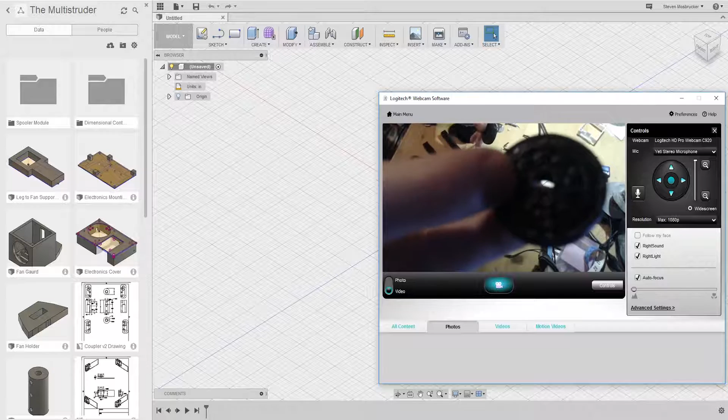Let me put this up here and get my webcam going. So I have a few things here - these are actually bearings, I don't know if you guys can see that, but those are bearings. And here's another bearing. So these are a few different settings.

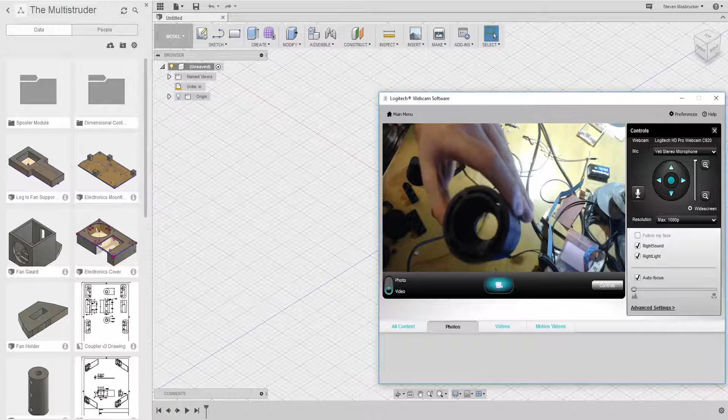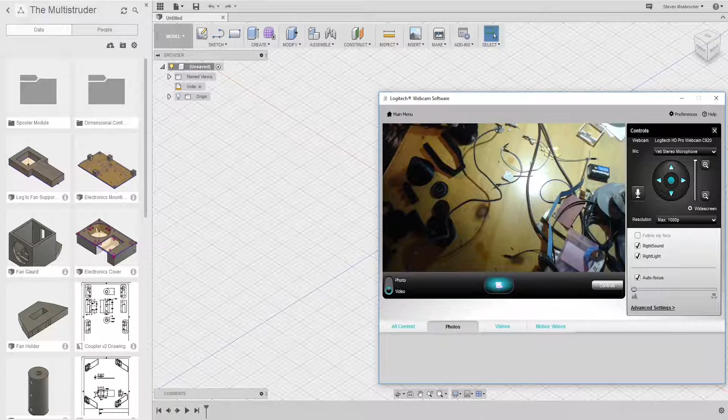First things first, let's go over this guy - this is the roller, and you can see it's been changed quite a bit. Let me get my orientation down here. It now has a bigger hole, and inside it's actually tapered. It has that same hole that this pulley does, if you remember. I'll show you guys that change here.

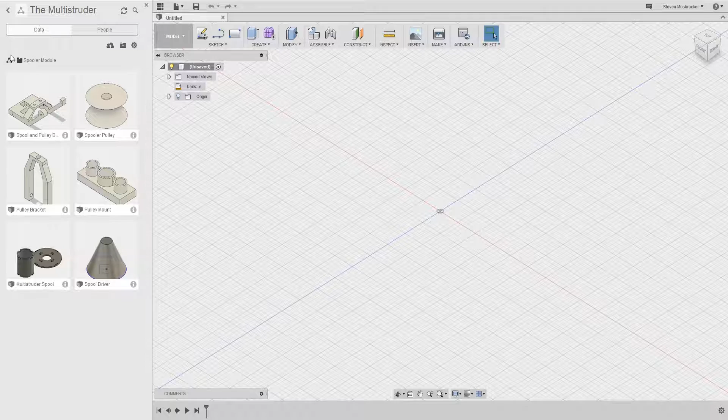Let's go ahead and move this guy over here, or maybe even up here. I like that, okay. So let me go ahead and show you guys what I did on that. Oh, yeah, and also sorry about my dirty desk.

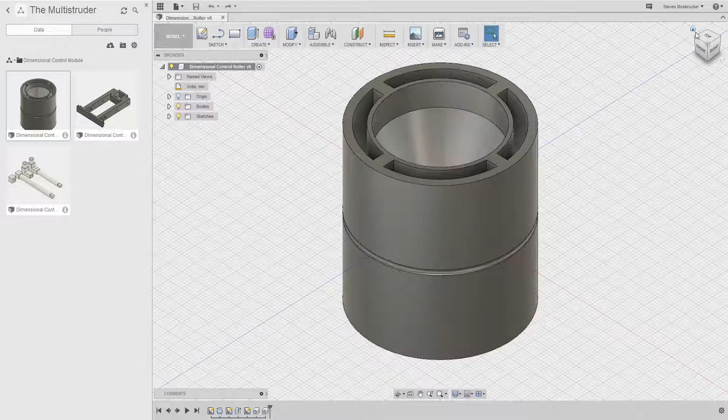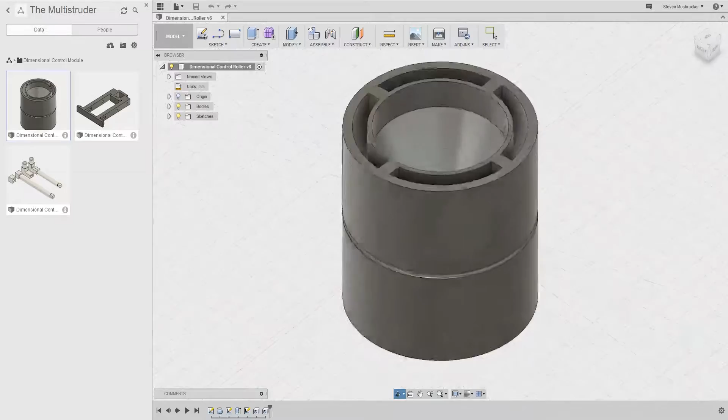This guy was set up for these larger bearings, so those bearings were definitely too small to have set up that way. You can see here the taper, because the issue with that flat spot is that it would be hovering, whichever side was flat - if this was closed and flat, it would be hovering. So again I had to do the 45-degree taper, just like on that pulley I showed you. 45-degree taper on this side, and also 45-degree taper on the other side, and also this hole is adjusted for the pulley. You'll notice for the pulley that these bearings fit in there.

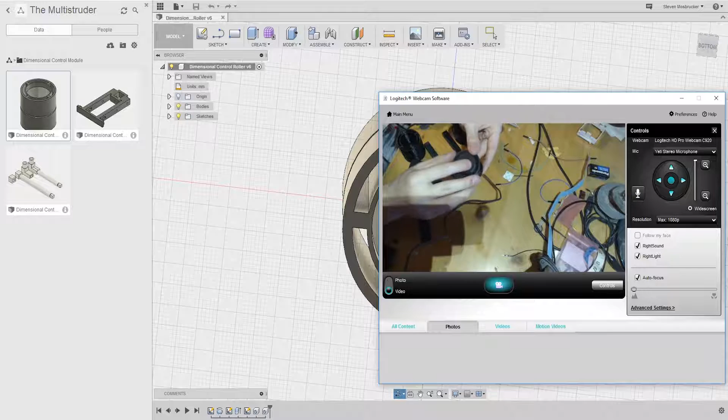Also, these bearings are going to need some work because they're too close to the outside. So what happens is they're fusing together and I can't break it free - they do work once you break them free, but I can't hold this inside hard enough and twist it to break free. As you can see, those guys fit in pretty snugly. So if I change that inside, I might have to increase the outer diameter, and then deal with that. And obviously this pulley is going to have to also be changed there as well - that's going to have to also be drilled out.

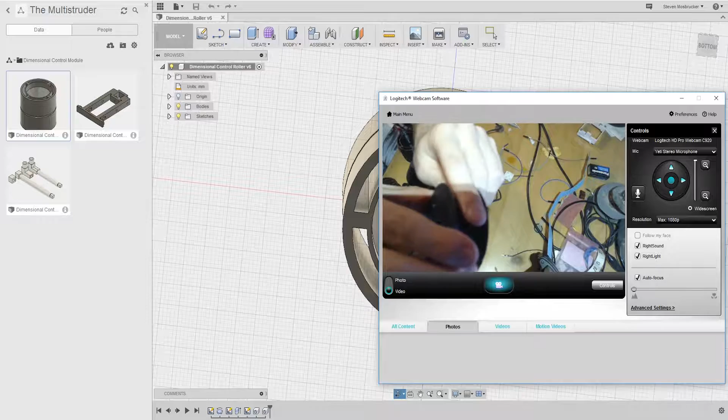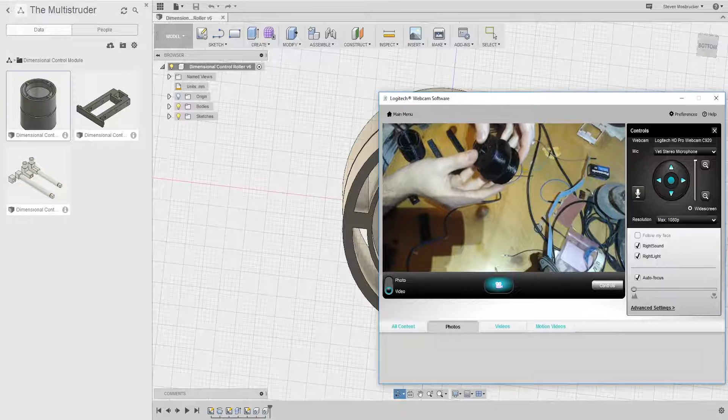So what I did is I just decreased the top diameter. If you compare the two here, there's quite a bit of change - I think I dropped it a whole inch or so. Now this guy has really smooth corners, really nice, but I don't know how well the filament is going to stay in that groove.

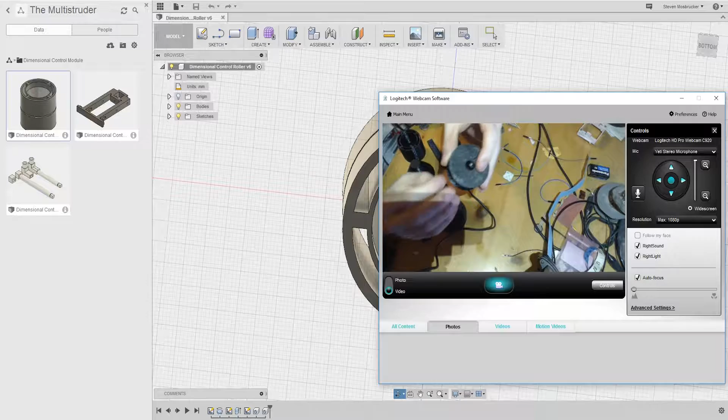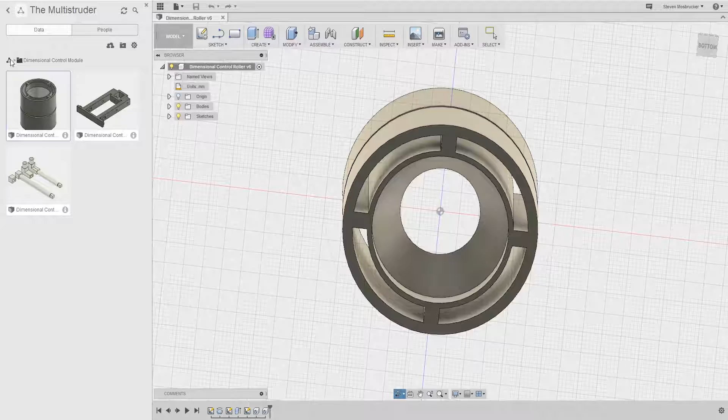So what I might do is go onto this pulley and just do a 45 and then revolve it, so that the filament stays right in that hole and doesn't go up and down on the pulley, and also eliminates any issues with that little sharp point at the top. So I'll change that and give you a look of that here - that would be the spooler module, right here. You can see now it's quite a bit smaller in the spooler module.

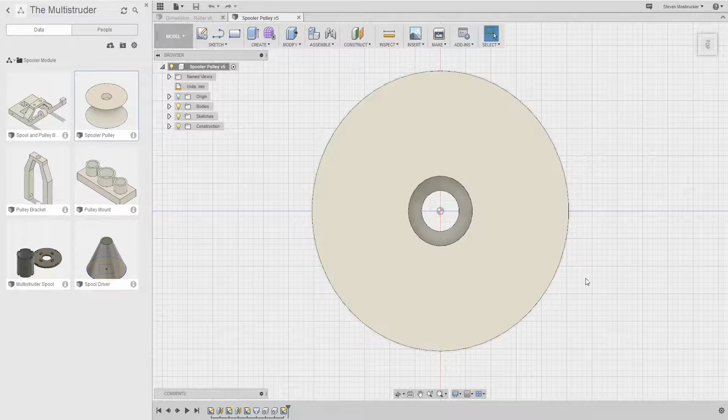This one is also going to need to be opened up, meaning it's definitely going to be a lot hollower. What I'll do is I'll probably first turn this into a V and then revolve that. So I'll probably completely redesign this one, get rid of those three planes, and pretty much start from scratch.

Go ahead and open up the next one while I show you guys. Let me see what the one I started with was. I started with this one, which is the one where the pulley attaches to, where this guy attaches here like that, right? And then this guy goes up and attaches to the big assembly, if you see here on my main screen, that big assembly there. So this is what we started with, right?

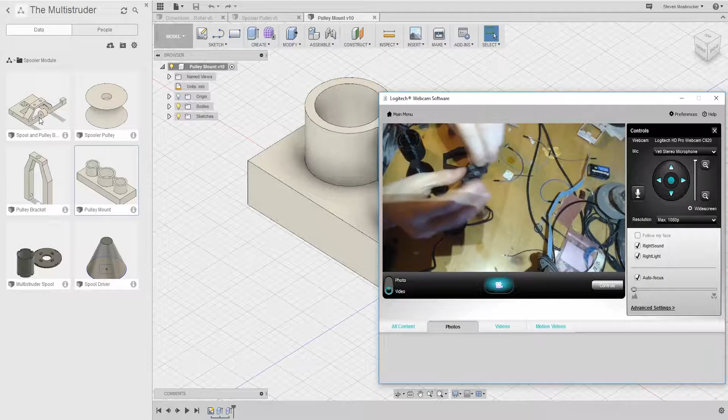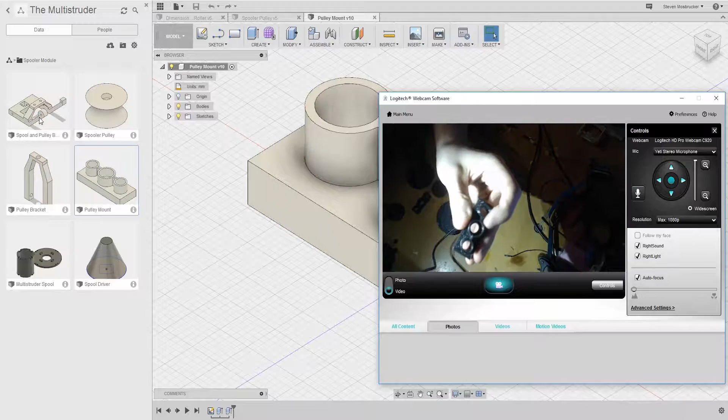So it was really narrow. What was the other issue with it? Yeah, it was a little narrow. Here I wanted to have a little bit more thickness, and I also wanted to create a web between each of these barrels. So what I did is I redesigned it really quick and printed it, and now there's a web between those two barrels, if you can see that. So now there's a web here and a web there, which gives a little bit more rigidity.

And then maybe I'll even put some gussets that go up and down like that. Maybe, maybe not, I don't know. So yeah, now some gussets. Let me put this over here so we don't have that shadow. Sorry about my messy desk. So here are those gussets that I'm talking about, and that is the adaptation that I did on that guy.

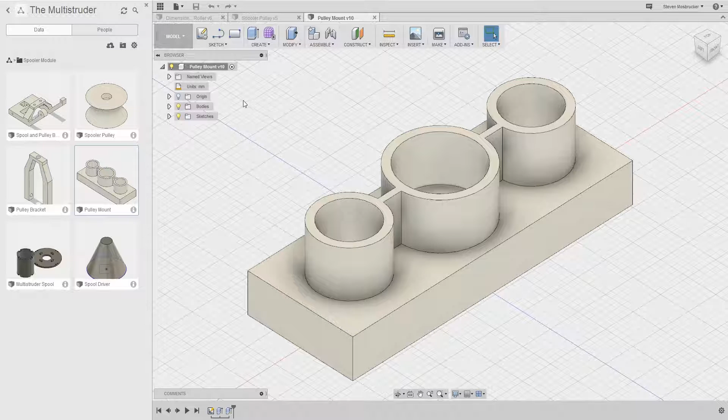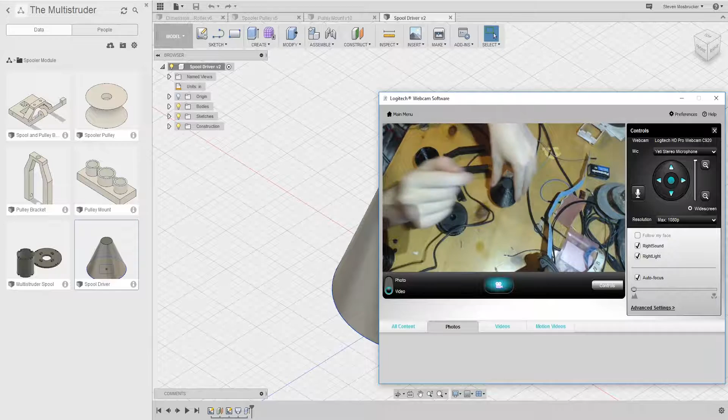Alright, another one is I printed the cone. Let's go ahead and open that. So here's the cone, and accidentally on the first one I was printing it like this, with this way up, and that's not going to work because there's a square. That's the part I was talking about that I needed to avoid — if it was printing like this, this flat spot would be hanging over nowhere. So you guys can see that flat spot of the square.

So it had to be printed like this, which worried me a bit with the small surface area attaching down to my plate. But a trick I learned from one of my buddies that I'll share with you guys: if you're using blue painter's tape, which is what I use, take a piece of cloth, put some rubbing alcohol on it — 99%, 95%, whatever — and rub down the painter's tape. You'll notice that the grab the painter's tape has almost doubles or triples.

I might have to do a video on this, researching it with actual data as far as the pull it requires. But it'll actually double the amount of how cinched down it is to the table. It'll actually double it.

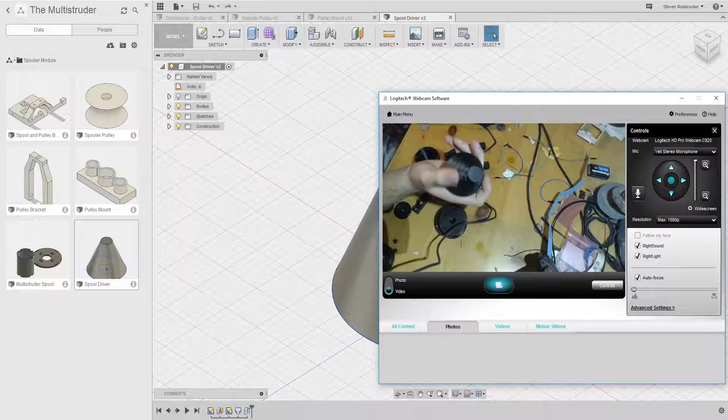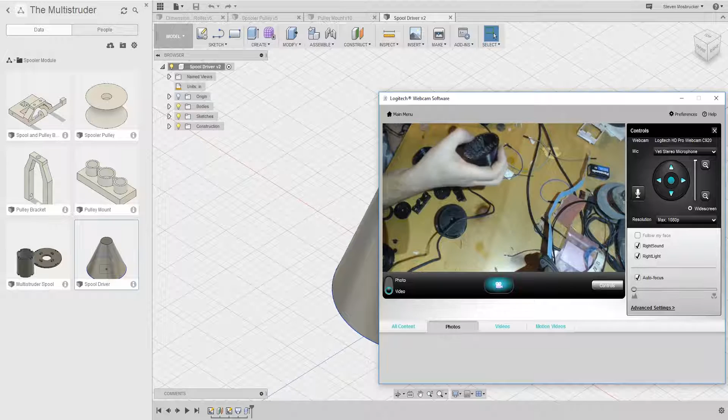So what you could actually do is control how hard it's grabbing onto the painter's tape, whether or not you clean the surface. If I don't want something to stick as much, I won't clean the surface. If I want something to stick way better, I'll clean that surface and make sure it sticks good on there. And as you see, it's stuck really good — I had to grab up here on the top and twist it back and forth to get it to pop off. But yeah, it would have been a lot more beneficial if it went like that. So maybe I'll do a taper there, I don't know, to even decrease the amount of volume that's in here as well.

And another thing I wanted to show you guys about this one is how it looks when I shove it into a spool. So I have a few spools over here. Let me grab them — okay, so these are two different spools. Totally forgot that you should be doing this with the spools here.

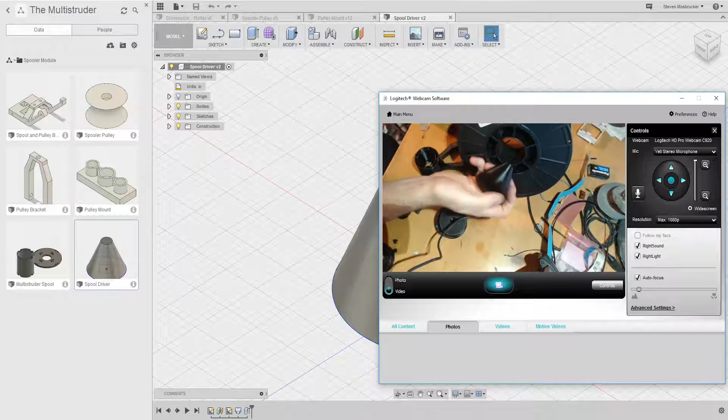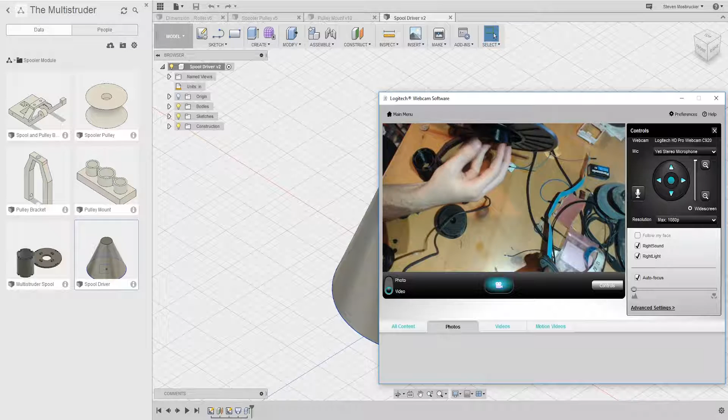Okay, so here's a Proto Paradigm spool, as you see, Proto Paradigm. And then here's the cone, and the cone fits into that guy. Again, this will have some rubber on the outside to give me a better coefficient of friction so that it actually grabs on. As you see, it fits in there perfectly. And that's like one of the bigger holes, and you see that I have about an inch or so of taper left. So that's the Proto Paradigm.

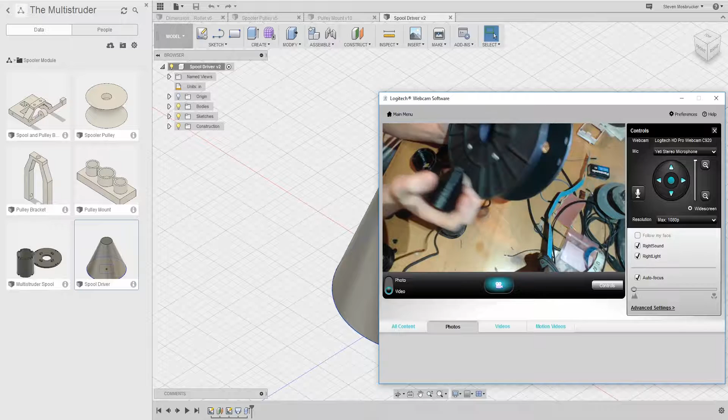That's probably the biggest hole that I've seen on most filament spools. This is the Shaxson, which is the Fry's filament. You see it's got a small hole, about 1.5 to 2 inches, something like that. And so as you see, boom, fits in there really nice. Again, it would have rubber on there, one from this side and one from the back. So that worked really well. I didn't change this one - it's unmodified.

We'll go back to talking about the bearings, because they're probably going to be the most challenging part. So here is that little wishbone, the pulley bracket, which you see here on my main screen. This attaches to this - the pulley attaches to this, and then this attaches to this, and then this has two shafts that go up through that hole, and then this guy has a spring that goes up top.

I have yet to print those two big ones. I haven't printed this one. Actually, I totally forgot to print this other one here. I haven't printed that yet either, so I'll think about it. I'm already in the video and I haven't printed that one yet. I'm not going to be able to print it here - I'm going to have to print that at Tech Shop because they have the larger MakerBot.

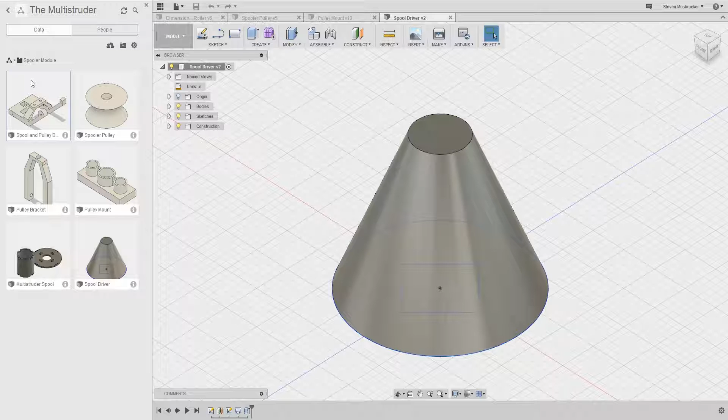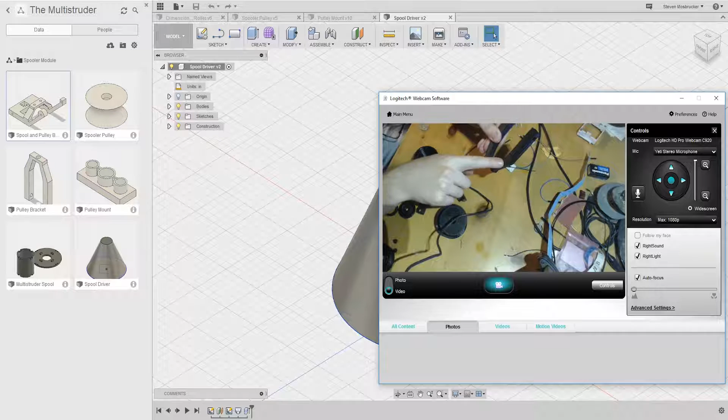Oh yeah, so back - this was actually a big change for me, and I'll explain why. So this guy, right? What happened is when I went on my Repetier host and sliced it, it did some weird thing with this little narrow piece down here. It didn't fill it, didn't put any infill on this piece. Like here, it didn't start putting infill till all the way up here somewhere. If I put my finger the other way, it didn't start putting infill till about here. So this was all hollow. And I was like, well, why would the slicer do hollow and not put 15% in there?

So the slicer was just doing some dumb crap, doing whatever. And then this was all infilled, but this wasn't infilled at all. It was super weak, just flexing like crazy. And then this was okay, this was fine. So why? These both were jacked up until here, and then it started to infill from a side, and that was over nothing. So the infill was not attaching correctly because it was just infilling over thin air.

So for the first time ever, I switched my Repetier host slicer to using Cura, which I've only used a few times, not very much - mainly at Tech Shop if I wanted to work on one of their simple metals printers. But I've not been using Cura at all. So this was definitely a big change, and the layout for the settings is a lot different and stranger to me. But when I went in to slice this guy, it sliced perfectly. It had all the infill in the right spot, good estimation of time, and very quick slicing - even on my shitty laptop from maybe 6 years ago, that's what I used to drive my console.

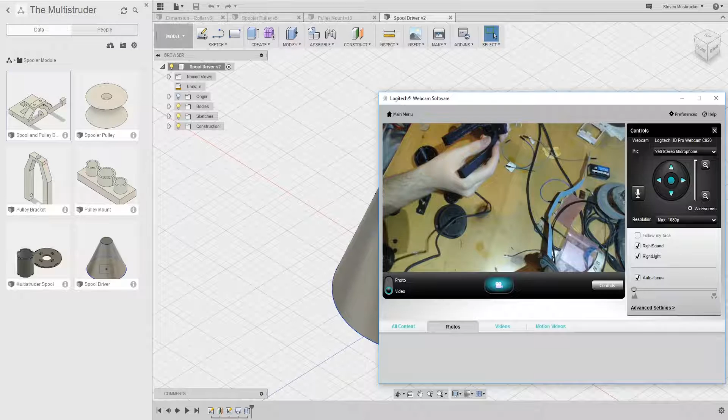So yep, this guy now attaches to that guy. Oh, now I thought about it - shit, I totally forgot about these holes. These holes here, derp. I don't know if you can see what I'm talking about, but there's these two holes here. I didn't even think about this guy connecting like that, and then over those two holes. So I'm gonna have to do something about that. Alright, well, derp - that's a derp moment.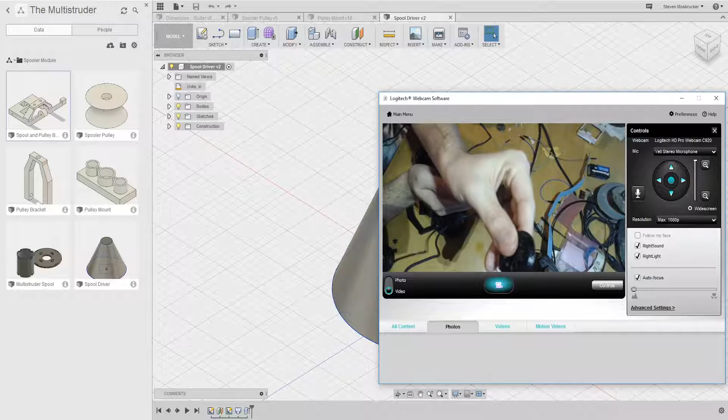Alright, anyways, so let's go back and talk about these bearings. I've had a few issues here - my console has a lot of loose belts on it, so it jumped a tooth here and put this piece here on it. I'm sure you could see that, it jumped a tooth. And also this one obviously is going to be way too bonded to free. And then this one, which was really good. Also, by the way, these both are ball bearings, so they have specific dimensions in order to get them to work properly.

This guy was a little too bonded, so basically what you do is you go on to Thingiverse, and I went into the customizer for this ball bearing, and you just enter in the information you want, the inner hole diameter.

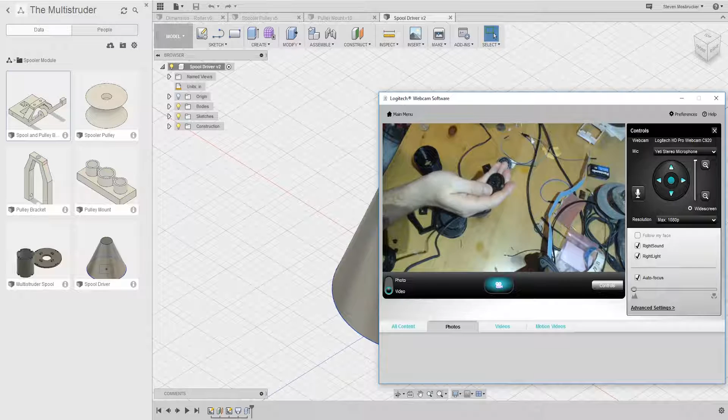The ball size, the ball diameter, which is the height of the bearing, the inner radius for this inner piece right before the balls, that diameter, and then the ball diameter, and then the overall radius diameter. And then in between that, you have the number that goes from the wall to the inner diameter, and then the wall to the outer diameter.

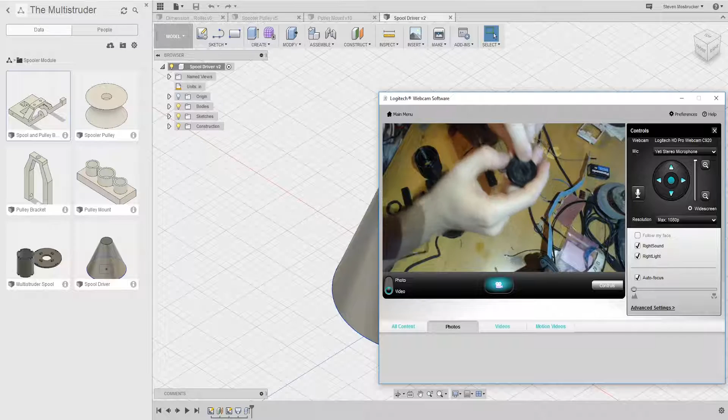The outer radius. So the distance between the balls and this radius, and the distance between the balls and this radius. That number is what keeps it floating, so that it's easy to break free and spin. But the smaller it is, the bigger the number is, the more slop you have.

And I printed this once before. I gave it to my dad, so I don't have it anymore. But it had one, I think it was two less ball bearings in it, and what would happen is it was easily freed. It had the stock settings, so it was just like boom, and it opened up.

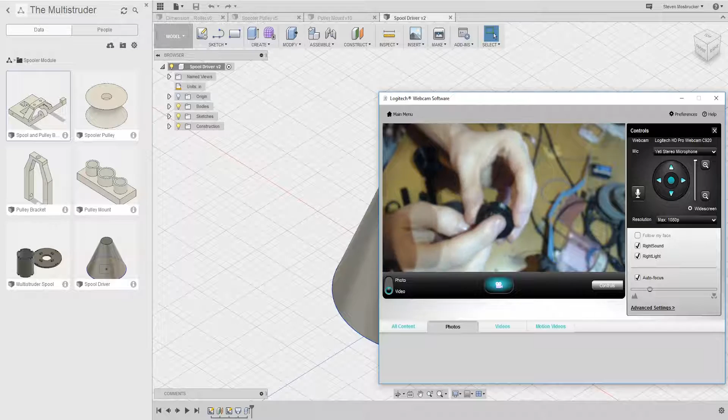And then each of these, what would happen is some of them would space out down this way, would have like a little space up in here, and then so you could just push the center ring, push the center radius up in there, and so there's a lot of slop, the X and Y. And then there's a little slop on the Z.

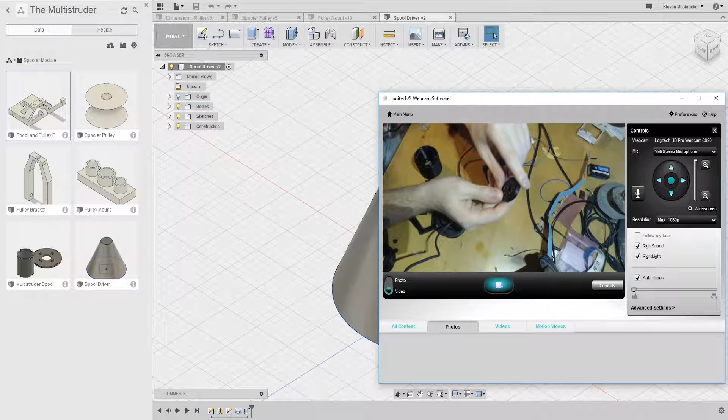So that should be fixed, because now I have the correct number of ball bearings in there, to where it just fits all the way around. Maybe too much, I don't know.

And then so I just need to probably maximize the distance between the two pieces there. But overall, this looks good. This will work fine in this little guy here.

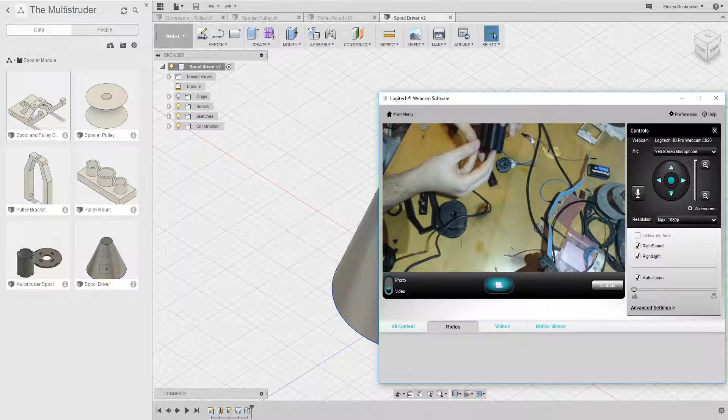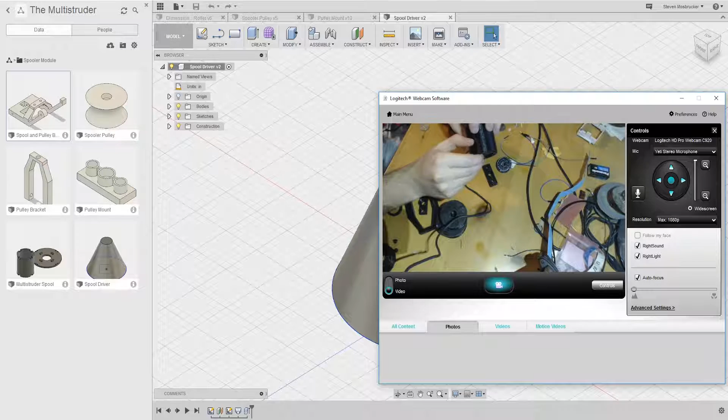And then this one, for whatever reason, compared to the other one, fits really loosely. And there you go. So then you put the shaft in there, it spins, and then even this guy's got the little ridge there. Ridge is hella small, but this is the 1.75 version. There will also be a 3mm version where you swap these guys out, or you could probably even run the 3mm in there, and it should be fine.

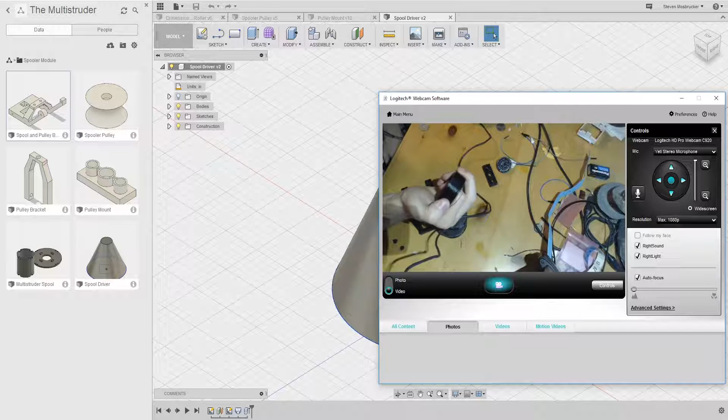Alright, so, oh yeah, here's a fail for whatever. I think one of my motors was getting hot, and then it was skipping steps, so it just kept pushing the hot end in there, and then it just started building up, and then you hear it jumping over the infill, and so you go over there and cancel it. And so there's something to go into my recycle bag.

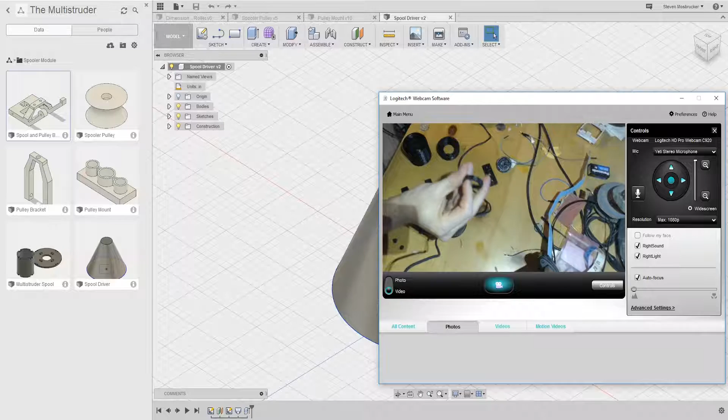Another thing is I had another fail, which here's an outside ring of a bearing. It's actually really cool, the customizer. This was a convex bearing. So here's the little ball bearing that went in it. Not a ball bearing, but a convex. It's a roller bearing, roller type. I don't know if you could see that.

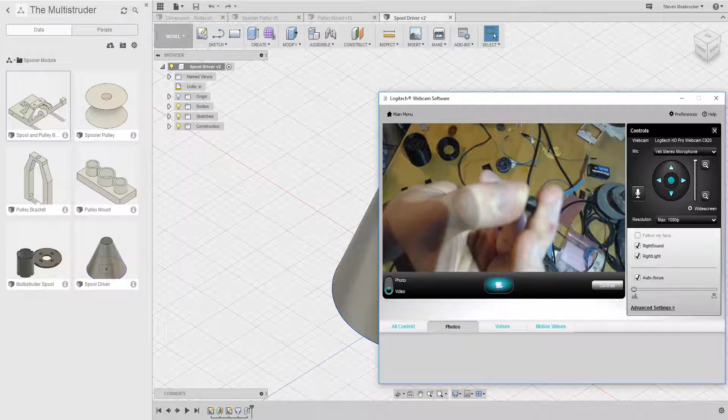Probably not going to be able to. But yeah, it's a convex roller bearing, and I got it free very quickly, and then I just pushed on it, and then all of a sudden all these guys popped out. All these guys came free and just rolled around the floor or wherever. Because in that one, it doesn't allow you to pick how many rollers you have in there. And so it only had like 4 rollers.

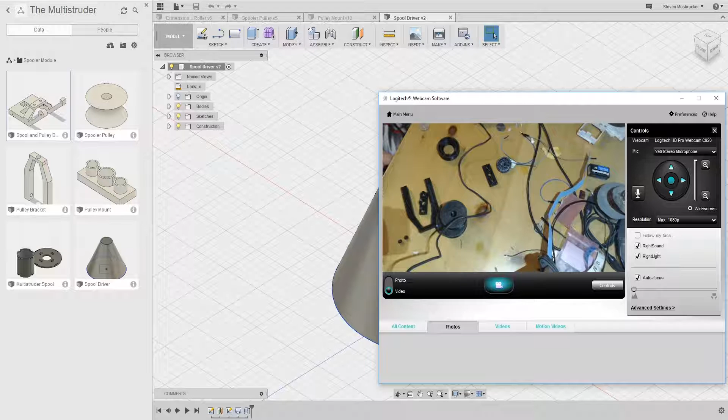Anyways, that is pretty much it. So I'm going to be working more on getting these guys finalized and printed, and then I'll go over the changes that I do for each iteration, and then we'll be ready to print an entire one and put it together, and then write the program that controls all of them, and talks to the Multistruder and allows us to get perfect 1.75, 3 mil, or 2.85, or whatever filament you want, and then automatically spool it up and then be ready to go for you.